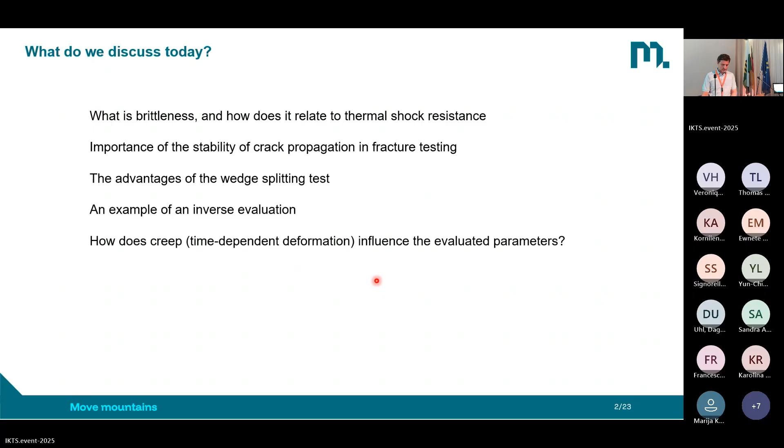So why do we need fracture mechanical testing of refractories? There's, first of all, we have the quality control. So you have to do it according to the standards after the production process to know which strengths your materials have.

Then you need it for material development, for sure. You would like to know which strengths your material have, that you develop. And then there is one section I call parameter determination, with the goal to have input parameters for your calculations.

So if you would like to have an idea about the thermal shock resistance, if you would like to have an idea about the stresses you will have in the application in the refractory material, and if you like to have the parameters for a finite element simulation, then you need these parameters. You need to do the fracture mechanical testing at the different conditions you have in your linings.

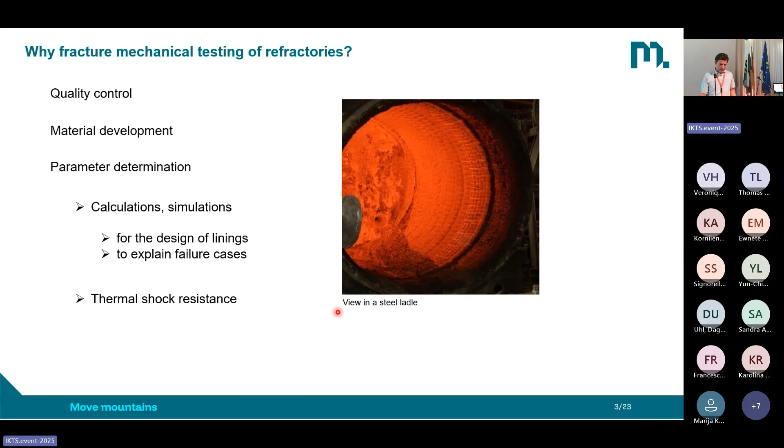I put it here as one single point: thermal shock resistance. I will go a little bit more into details for this one afterwards.

But first of all, I would like to discuss with you a curve like you see it here. We have a force and a displacement. This is a result from a fracture mechanical test. What we see, we start at the beginning, then we increase the displacement, we record more force, and then for sure we have a maximum. We reach it, and we further increase the displacement, and then we see that the necessary force for the further displacement is decreasing. So why is this important?

What we see here, the area under the curve, is the energy which is consumed for the fracture process. And the main part of the energy is consumed after the maximum of the load displacement curve. So if we would like to have an accurate representation of the energy consumed for the fracture, we need to register the whole curve.

What does it mean now for us? If we would do a force-controlled loading, then the test would end here at the maximum force. Why? Because the machine is further increasing the force with a defined rate, for example, in newtons per second. And then we reach a state where the sample is not stable anymore because we further increase the force. Fracture would happen. In this case, the diagram would look like this: we reach this point and then we have an immediate fracture, and no further displacement can be applied.

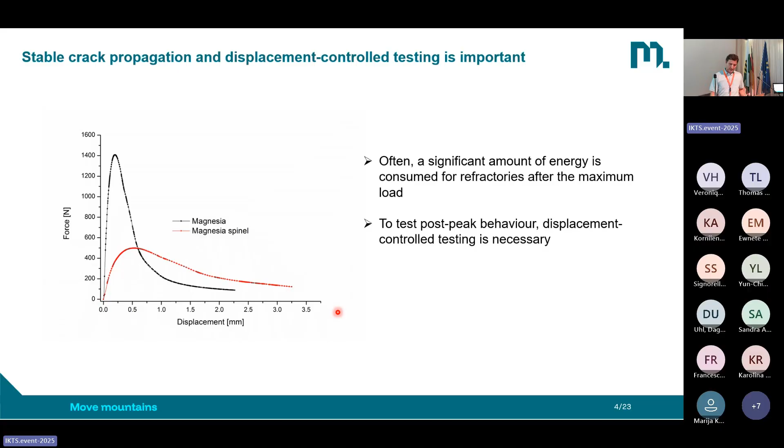So what do we need to know about the stability of a fracture? Here's a very simple drawing of force over displacement. If we assume we do a tensile test, we start at 0, force is increasing, we reach the maximum. And if we have an unstable fracture, we have an immediate decrease of the force to 0 - unstable, brittle fracture.

Then we could have a semi-stable fracture represented by the blue curve, so we have a short contribution from unstable fracture, and then it's turning to a stable one. The green curve represents the stable fracture. As described before, to determine the energy required for the fracture, we need to have a stable fracture.

What is now influencing the stability of a fracture process in our sample? There is one important number, it's called the brittleness number. How is it calculated? It's a relation between the elastically stored energy in the sample in the testing machine, divided by the irreversible consumed energy - this is the work of fracture, which is necessary to fracture your sample.

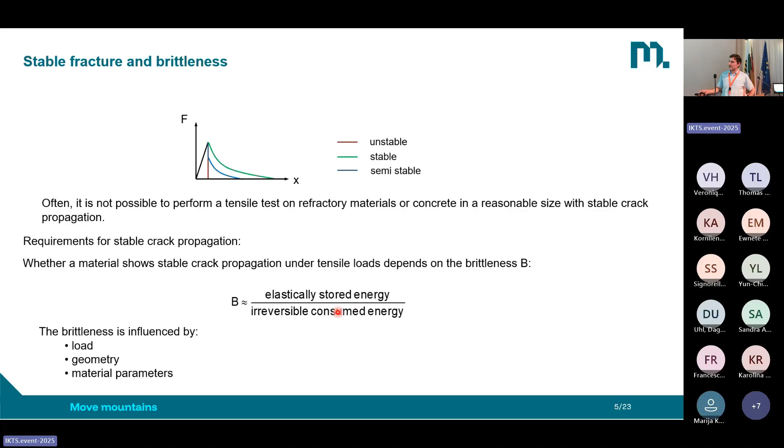So it could be a tensile test or a wedge splitting test as well. And how is this brittleness influenced? Influenced by load, geometry, and material parameters.

If we go a little more into detail, we have again this simple load displacement diagram from a tensile test. We start at 0, increase the displacement, reach the maximum force, and in this example we have a stable fracture with a linear softening behavior of our material.

If we do these calculations to make a relation between the elastic energy and the work of fracture, we can start like this: we have the force multiplied by the displacement at maximum force, divided by 2, because the area of this triangle is the elastic energy at the moment of fracture. This we divide by the work of fracture.

We can replace the force with the strength of the material multiplied with the cross-section of the crack. Then we can replace the displacement by the length of the sample times the strain at maximum force. And we can replace the work of fracture by the specific fracture energy multiplied by A - specific fracture energy is the energy per unit area which is consumed.

In the end, we get a relation: the tensile strength squared, multiplied by the length of the sample - in this case, length of the tensile test - divided by the specific fracture energy multiplied with the Young's modulus. This is the balance between elastically stored energy and work of fracture for a tensile test, describing the brittleness of this tensile test.

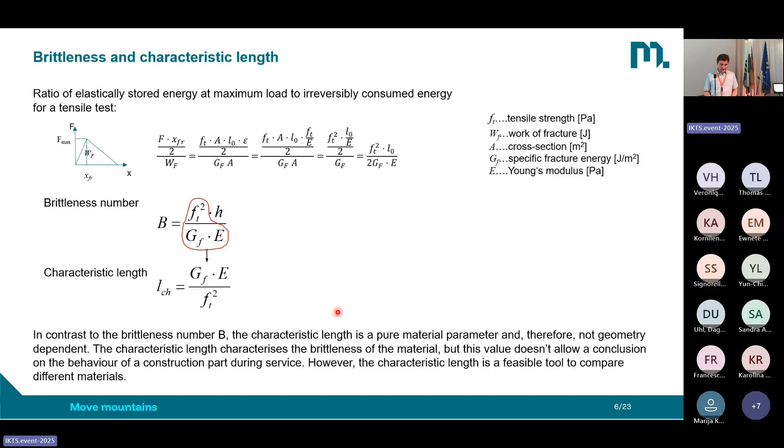And that's why I would like to discuss and introduce the wedge splitting test. Many of you, I'm sure, know it already, but I'm also sure not all of you. So what do we see here?

We have a cubic sample, and here you see a wedge, which is pushed downwards by the testing machine, and you see rolls in contact with load transmission pieces, which transport the vertical load applied here to a horizontal force acting on the sample. This horizontal force then splits the sample.

The crack will initiate here and propagate along the side notch through the sample. In the end, we have the two totally split halves of the sample, and we can record the complete energy required to split it and have a complete fracture process.

So what is the advantage of this test? First, the fracture surface we generate when we split the sample is relatively big compared to the volume of the sample. This is important because the larger the volume of the sample, the higher the elastic energy stored in it, and the more elastic energy we have, the higher the brittleness number in the end. So this helps to have a less brittle fracture for the same material.

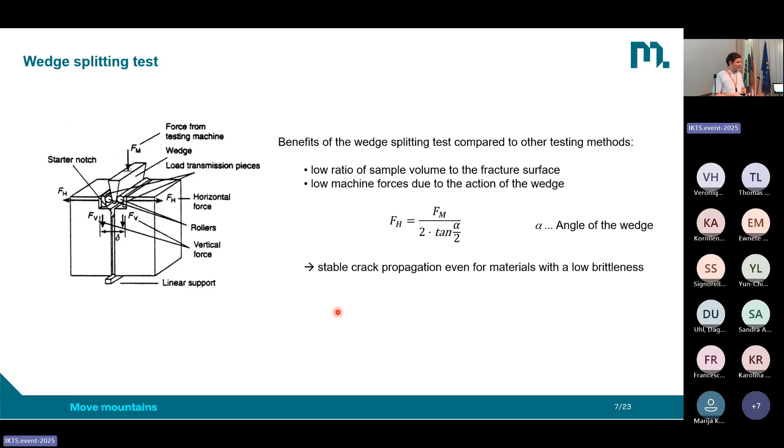How can we then evaluate the test? We see here a load displacement diagram, again with maximum force and then the softening behavior. We have this area under the load displacement curve, which represents the energy consumed for the fracture process.

How is it then calculated? Specific fracture energy GF is 1 over A, where A is the cross section of the fracture surface, multiplied with the integral over the load displacement curve. So we integrate the force FH and multiply it with the displacement.

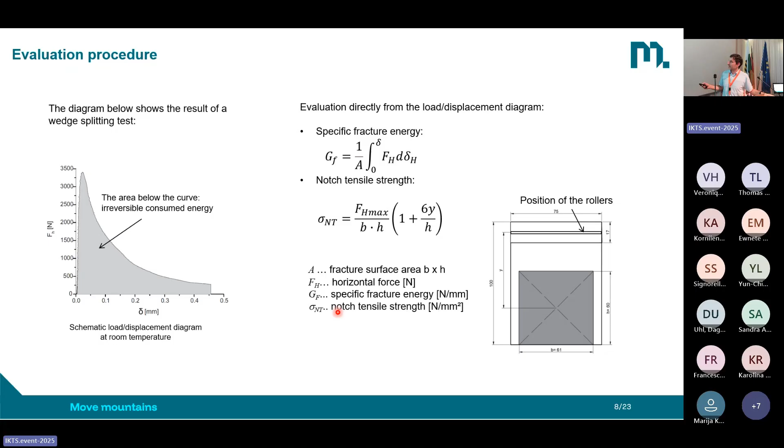Additionally, we can calculate a strength value called the nominal notch tensile strength, where we use the maximum force from the load displacement diagram and multiply it with this term here, which I would like to explain on the next slide. So how is this part composed?

We have the maximum force divided by b times h. b times h is the fracture area you see here in gray, plus - this is coming from the tensile load - plus a bending load, which is calculated by the normal distance y from the load application point to the center of gravity of our fracture surface,

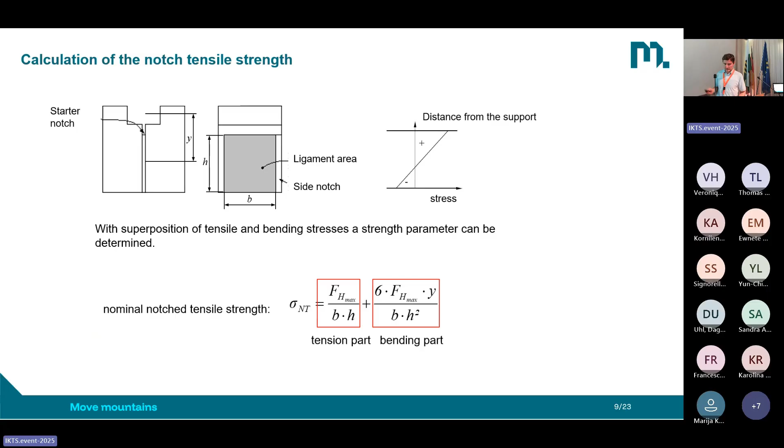and divided by the resistance moment of this shape. This means we are assuming that the stress distribution is a combination of a tensile load and a bending load in the sample, and then we calculate this nominal notch tensile strength.

So now you may ask, is this assumption that we have this combination of tension and bending justified? The question is not that easy to answer, but what we could do is a finite element simulation and simulate the stress distribution in the sample. This is what you see here.

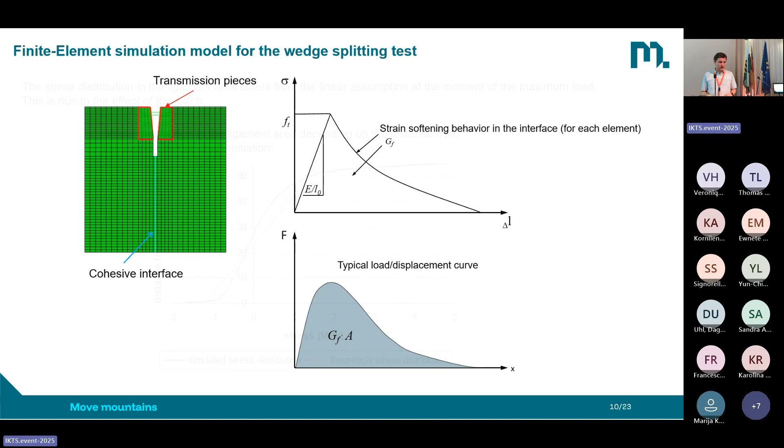So, we did our simulations. Now the question is, you remember we have been thinking, is this assumption for the nominal notch tensile strength justified or not, to have a combination of tensile and bending loads? What we see here is the first part of the answer to this question.

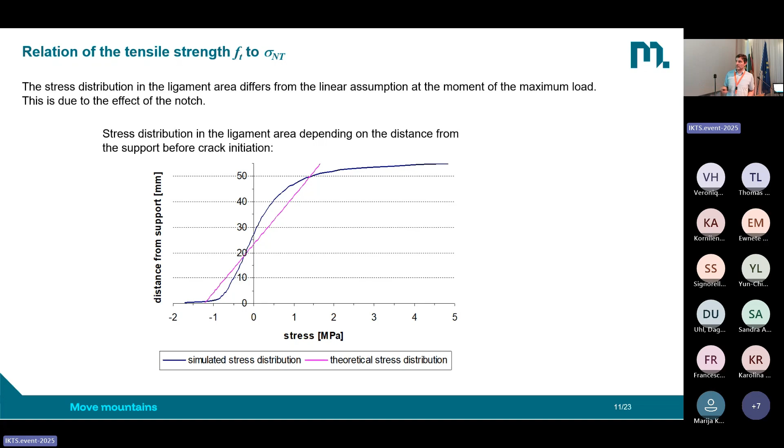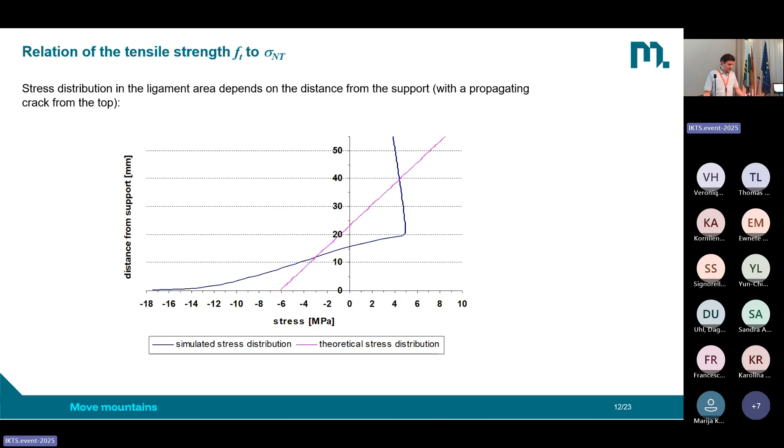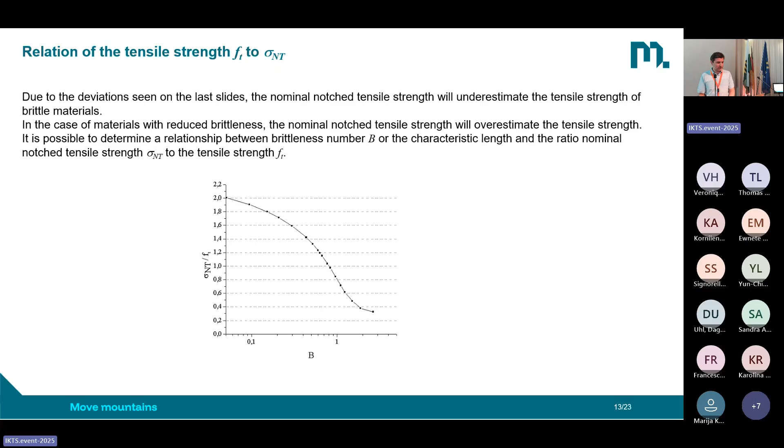So now we know the nominal notch tensile strength is a parameter which does not represent the tensile strength. We know we have these deviations. How can we deal with this problem? One possibility is to again use a simulation to determine accurate values. How is it done?

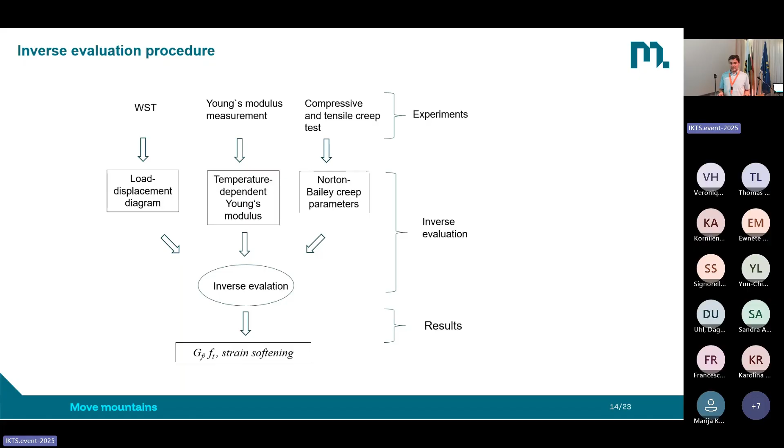We take the result from the wedge splitting test load displacement diagram, which you already saw. But then we additionally do a Young's modulus measurement to have this input Young's modulus of the material. And at high temperatures, there is also this deformation under constant load, called creep, which may also play a role. So we do these measurements beforehand so that we have this data. Then we start an inverse evaluation to determine the specific fracture energy, tensile strength, and the strain softening behavior. How does it work?

We have our sample, produce a finite element model, for example with the commercial software Abaqus. We have an initial guess of our parameters, do the simulations, obtain the load displacement diagram. We then discretize the load displacement curve and compare it with the experiment, and see how close we are. We define a convergence criteria. If we do not fulfill it, we estimate with a solver a new parameter set and go back to the simulations, until we observe convergence and have our results.

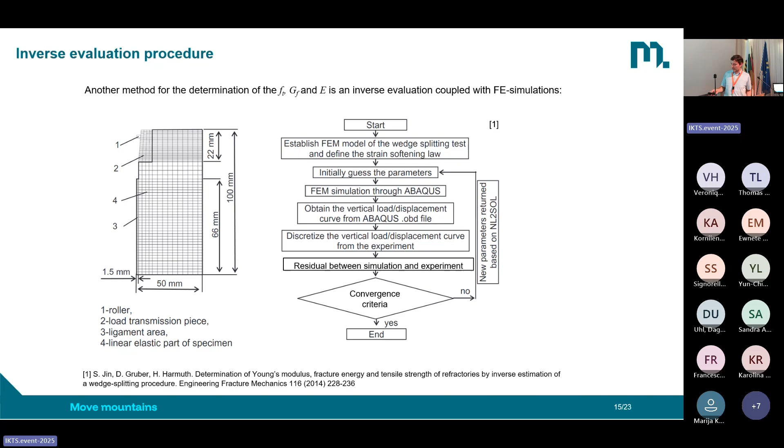Also, for the specific fracture energy, we see 152 Newton per meter, or joule per square meter, and 178 from the simulation. So what is the difference here? From the experiment, we can only integrate the curve until we end the test. But for the simulation, we observe a higher value because the simulation assumes that we are going to the end, considering the whole curve.

What does it mean now for the characteristic length if we have these two different parameter sets? If we take the parameters from the experiment, we are getting 163 millimeters, and from the inverse evaluation, we are getting 477. So it's completely different.

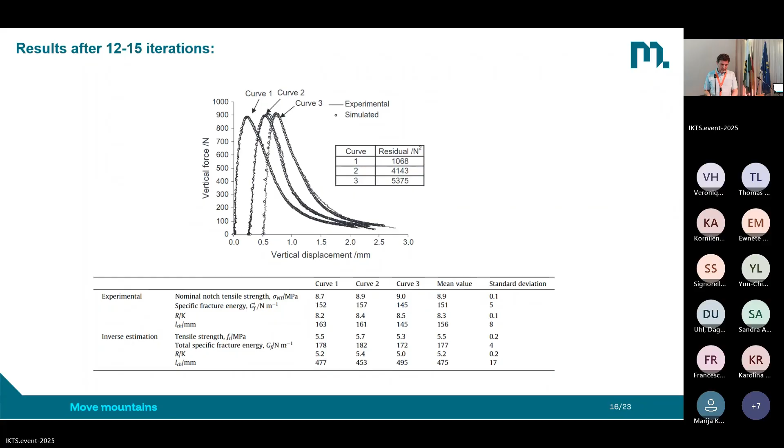So these have been room temperature experiments and evaluations. We can also simply do this test at high temperature.

You see here a magnesium carbon sample in the furnace with the heating elements, a thermocouple for temperature measurement. Here you see the linear support and the wedge with the rolls for the load application. The wedge is pushed down to split the sample. You see here already the sample after the test, and the crack already propagated through the sample.

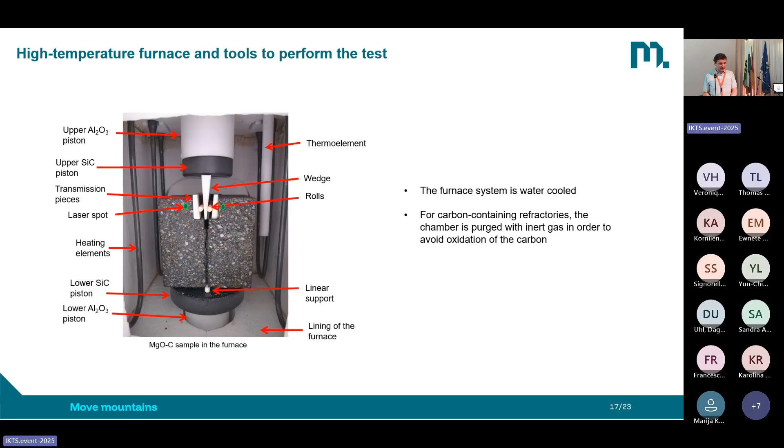If we do it at high temperature, then again, we could do our inverse evaluation. You see in red the experiment, in blue the inverse evaluation. Again, there's a good fit. We can apply for the softening behavior an exponential law, as it is already implemented in Abaqus, and see that we can get a good fit for high temperatures as well.

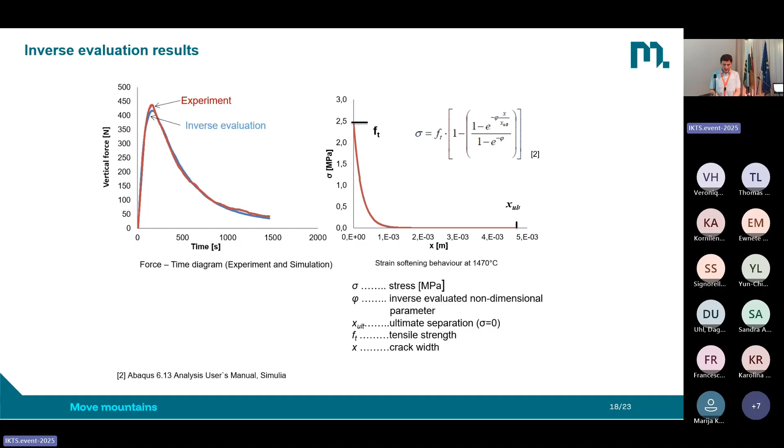But this is without considering creep. If we now consider creep, because the sample is loaded at high temperature, during the test creep will happen as well. If we consider it in the simulation too, the fit is quite good, but the specific fracture energy determined with creep is significantly lower than in the case without creep.

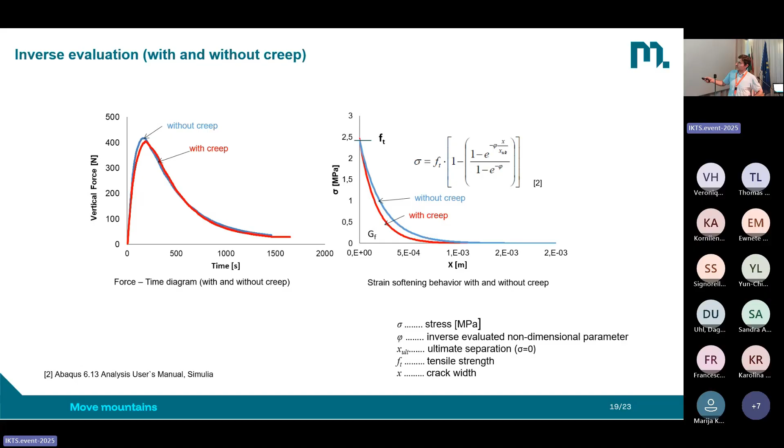Why is this the case? Because the sample is deforming due to creep during the test. Creep is contributing to the area under the load displacement curve. So we need less additional work of fracture to fill the whole surface under the load displacement curve. That's why this value with creep is lower than it is without creep.

And how much is it? You see on this table, without creep, we are getting 563 newtons per meter, and with creep, 417 newtons per meter. Again, a significant difference. What is important to know for all of you doing this test, especially at high temperatures, is that the contribution of creep depends on the speed of the test.

So, because creep is time dependent, if you have more time, then you have more creep. Be very careful, because if you do a very slow test, then you will get very low specific fracture energy, but a huge contribution from creep.

For the tensile strength, we see that with including creep, we are getting a higher tensile strength. Why is this the case? Again, because of the contribution of creep, we need more strength to reach the same maximum in the curve.

Then we can again calculate the characteristic length for the cases with creep and without creep, and again, we see a significant difference.

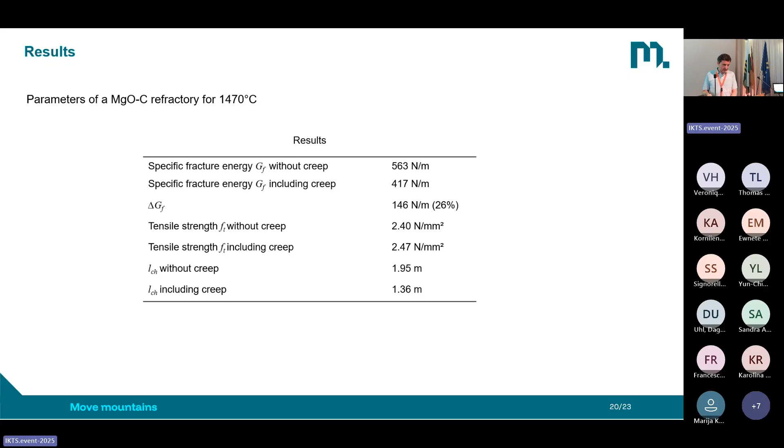So at the beginning, I was mentioning the thermal shock resistance and how this relates to the brittleness and the parameters we determine. Without going deep into the literature or theory, I would like to discuss two simple cases. We have two ideas, one from Kingery, the other from Hasselman, to increase the thermal shock resistance. Kingery said: I would like to avoid the crack initiation, like you would do it for fine ceramics usually.

What is my idea behind it? I make a relation between the elastic strain. So R represents a temperature difference in a plate, and alpha here is the thermal expansion. If I multiply R with alpha, then I have the thermal expansion. On the right-hand side, I have the tensile strength divided by the Young's modulus, which is the fracture strain. So if my thermal expansion equals the fracture strain, then I have fracture, and this I would like to avoid. So it's about the strain.